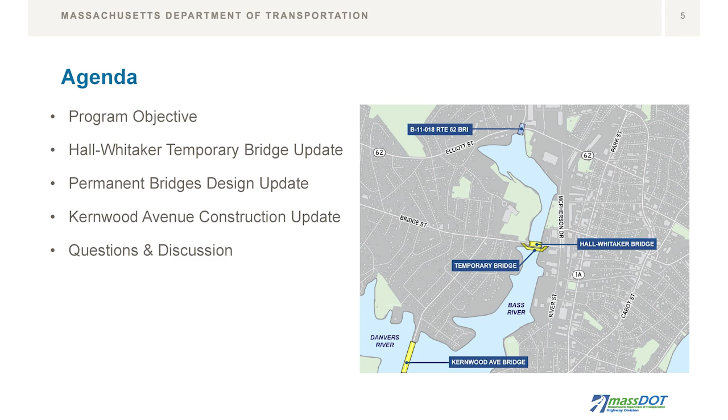So just to quickly go over our agenda, even though the mayor kind of blew through that pretty accurately, we're going to go over our objective, the temporary HALL-WHITAKER bridge update, the permanent bridge updates, Kernwood Avenue construction update for the maintenance project, and then we'll have some questions and answers.

So just to revisit our program objective, it's one program, two bridges. We want to restore vehicular traffic to Bridge Street. Currently, there's only bikes and pedestrians that are crossing that bridge. It still opens for marine traffic, but while we continue maintenance and rehabilitation of the Kernwood Avenue Bridge, we'll be progressing that, as well as the full bridge replacement of both the HALL-WHITAKER and Kernwood Avenue Bridge, and we want to deliver this program in the safest and most efficient method possible.

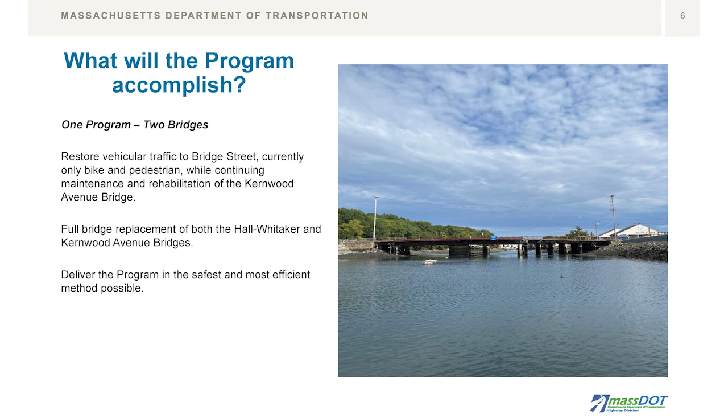So the Hall-Whitaker temporary bridge update. I'm going to run through the staging and permitting approaches, some changes that made things a little more simplified, regulatory agency approval status, schedule update, and the construction sequence.

This slide shows some staging and permitting approach changes. We added an early utility contract that allowed us to move all the utilities off the bridge. I think that's already completed at this point. Everything that needs to be out of the way to allow us to begin construction as soon as the contractor is on board for the temporary bridge has been moved out of the way. There is a phase 2, but none of that will slow down the progress of building the bridge.

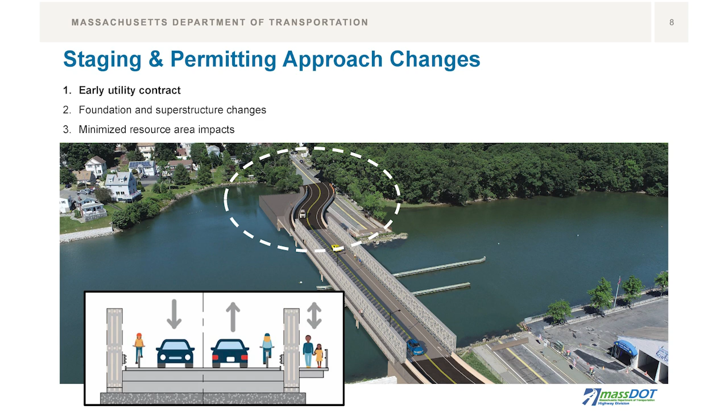There were some foundation and superstructure changes that minimized resource impacts. So what was this design change and why? Some of the challenges we were facing with the original design, which was a filled section—you can see that square section on the west side of the bridge, it looks like a platform—that was a filled section. So we were filling in mud flats, and that was impacts to the resource area, and that required some really complex permitting.

So VHB came up with another approach. They are going to install that platform on piles, and some of the benefits of doing that is minimizing those impacts to the resource area, simplifying the permitting process, and reducing some of the construction risk.

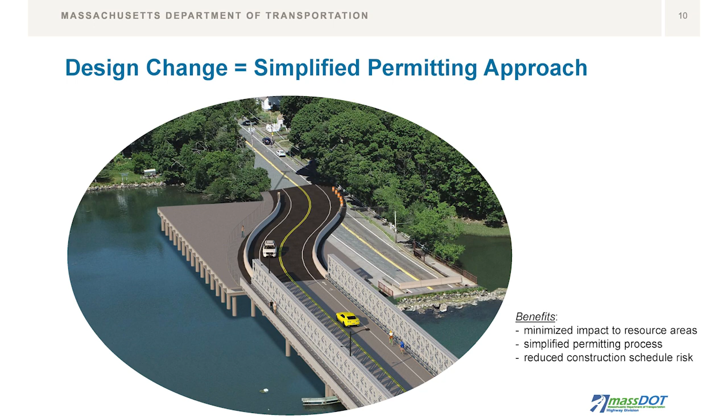So regulatory agency approval status. At this point in time, we have all the permits we need to construct the temporary bridge. This was a major collaboration, as the mayor said, between the mayor's office, the governor's office, MassDOT, all the state and federal agencies, and we were able to expedite this in a fairly quick manner.

One thing that happened was the Coast Guard denied our advanced approval, so we do not have the Coast Guard permit. That's one permit that is still outstanding. We have to go through the regular full bridge permit process. That will not slow down the advertisement of the project. Right now it is under review, and we're confident that we'll have that in time for our notice to proceed.

And with that Coast Guard permit will come the NEPA categorical exclusion, also known as the CE, that will come at the same time.

I want to further emphasize some of the benefits of the collaboration that helped expedite the permitting. Not only that, but simplified it, and we got some really great benefits that are going to help advance construction a little more simply and quickly. NOAA, the National Oceanic and Atmospheric Administration, issued conservation recommendations, CRs, for work in water in the Bass River. This is essentially controls and best management practices specified or intended to avoid, minimize, mitigate adverse effects to essential fish habitat, EFH, and protected species.

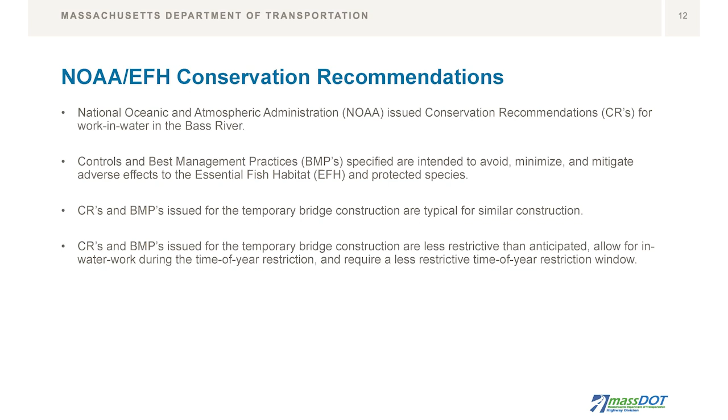So to update the schedule, going back to our last public information meeting last spring, April to July 2024, we received a 75% highway bridge design submission that was reviewed and approved. Right-of-way was approved. In the summertime, we finalized and submitted all our environmental permit applications, and completed additional borings at Bridge Street that we needed. Then in the fall, leading to the end of the year, we finalized our 100% design. That was approved, and the right-of-way plans advanced as well.

And now here we are in January. We have our final PS&E submission—we just got the very final today. So we'll be finalizing bid documents. I think we were last here saying that we were going to advertise in the spring of 2025. We're really happy to say tonight that we're advertising February 22nd of 2025.

All our final environmental permits are just about done, and we're just still waiting for that Coast Guard permit, but it won't slow things down.

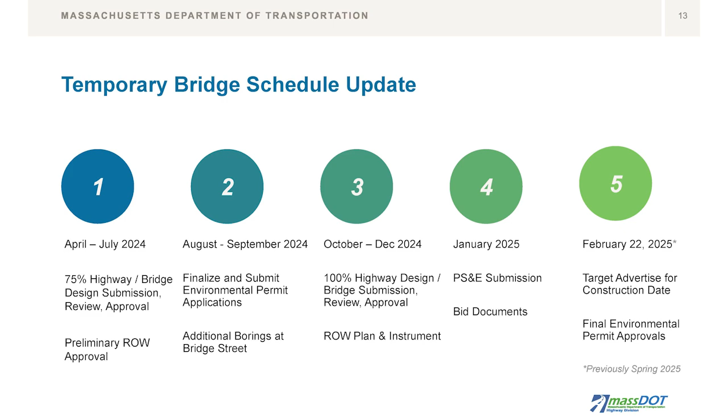At this point, I'm going to turn things over to Nick from VHB, and he's going to describe the construction sequence and how we're going to build this temporary bridge. Nick?

So our design is essentially complete at this point, and we're finalizing what we call our contract time determination, or CTD. It's a construction schedule and a sequence of activities that gives us a level of confidence that we can construct the project and how long it's going to take, so that we can include that duration in our contract with our awarded contractor.

So I just want to talk through some of the sequence. The top of the slide here is the existing plan. This is what we basically started with. The orange indicates the existing bridge out of service. Ryal Side neighborhood is on the left of the screen here. The car wash, Moynihan parking lot in downtown Beverly on the right. The arrows indicate pedestrian access.

So we are maintaining pedestrian access up until our utility contract. As Rob mentioned, we took our first phase of utilities, shown here as phase 1 by others, and created a separate contract in advance of the bridge contract. That would allow us to do all of our third-party utility coordinating and relocations ahead of the bridge construction contract. That mitigates schedule risk as well as coordination risk with the utilities.

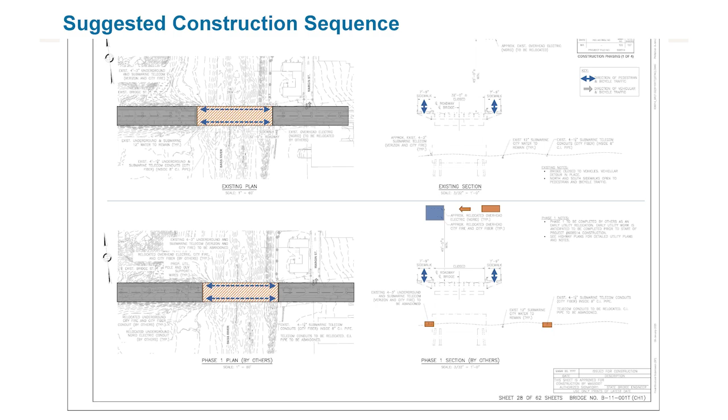That work is ongoing right now. Simultaneously, MassDOT has undertaken the rehabilitation of the northern sidewalk. So that's why that northern sidewalk is out of service. The deck is heaved, and that's being completed as part of one of their maintenance contracts.

With the early utility contract, looking here, this is a section of the bridge. We're going to relocate the overhead utility lines from the south to the north. We're also going to relocate the underground and actually submarine cables. So on the right here is a city fiber line that will be relocated with the National Grid overhead.

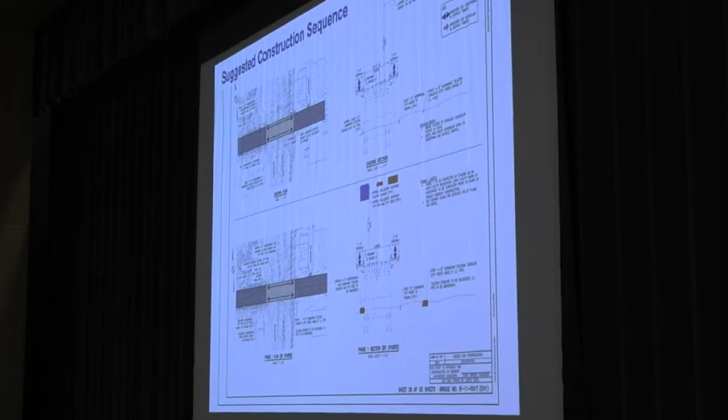The Verizon line is being rerouted to a different service that stops short of the bridge. These lines will be abandoned in place. There's also a city fire alarm that will also be relocated from submarine to overhead. That will set us up for the temporary bridge construction project.

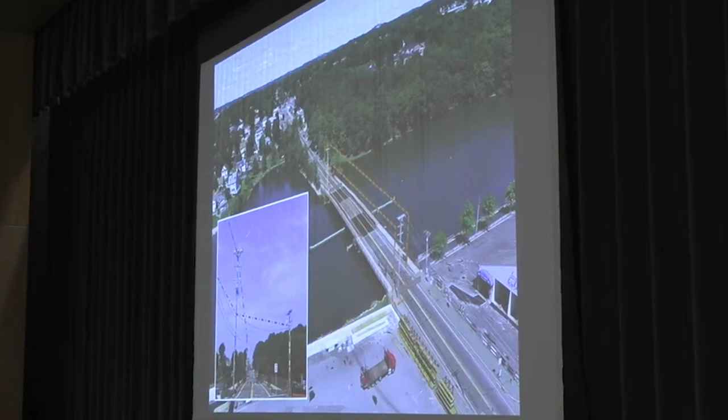So looking here, this is a rendering of the existing bridge. You can see here the utilities on the south side. Here you can see a shot looking from the Moynihan and car wash side towards the bridge, showing all the overhead utilities and the crossings.

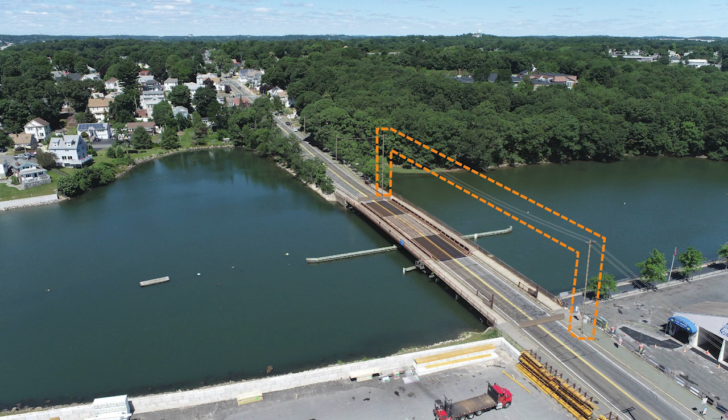The idea is that we will move all of these out of the way under this early utility contract from the south to the north of the bridge. That allows us to start construction on the south side for the temporary bridge, where it will come out, around, and then back in.

Going back to our plan views, again Ryal Side on the left, downtown on the right. Our construction sequence is such that, as Rob mentioned, we have a platform. We're calling it our approach span. This is supported on piles. The intent is that this becomes a staging area for the temporary bridge construction.

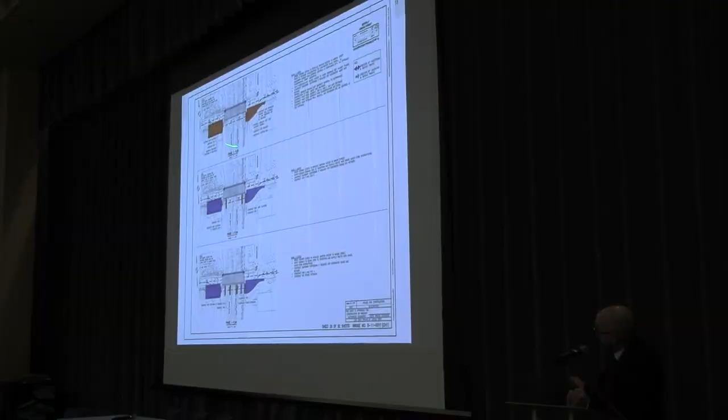So while we're constructing on the west, we're also constructing on the east a retained fill section, and we work in from outside in. In the next phase, we'll start constructing from there, reach in over the water, and start construction of our abutments and piers, which are supported on piles down to rock. Then we'll continue that and continue to work on the inside.

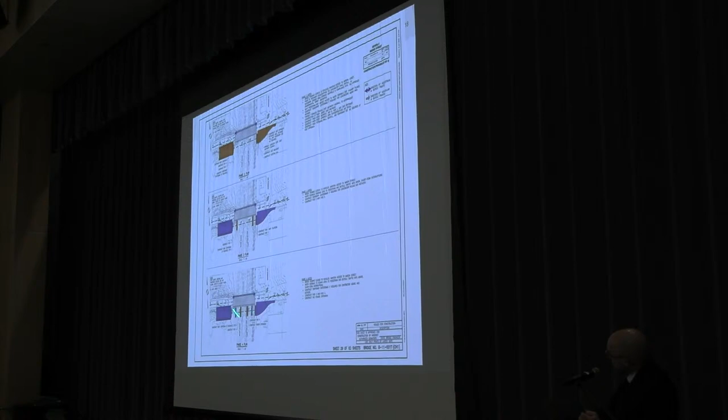The project is permitted such that we have the ability to work from barges and from land. Once the substructure is installed, the substructure being the piers and abutments, we'll start construction, completing our platform. This includes a concrete cast-in-place deck.

And then from there, we'll start construction of our panel bridge, our prefabricated panel bridge. It comes in sections of 4 to 12 feet. You'll see a rendering of one of them on the next slide. It's built in sections, and as we build it, we launch it on rollers.

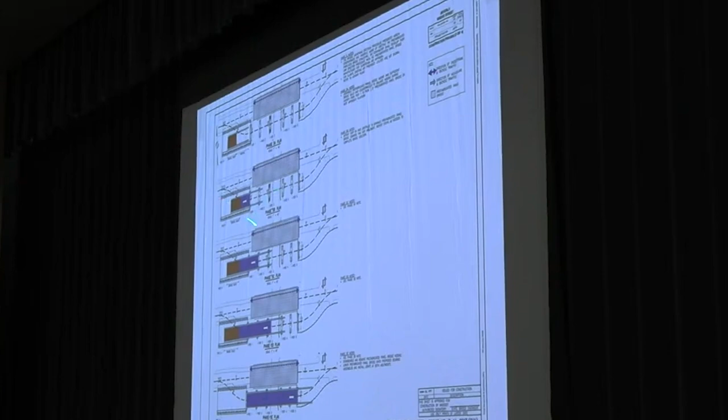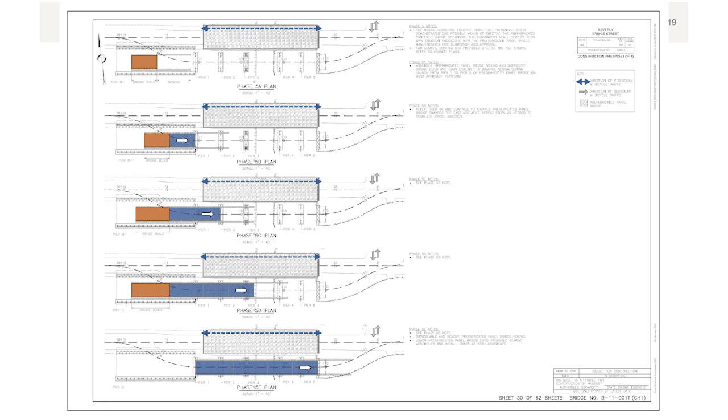So we essentially cantilever it out over the crossing with a back span of counterweight. Another method that is possible is using an assist crane, either from the land or from the water, to counter that load as well. And we build and launch, build and launch, build and launch until we have completely crossed the river.

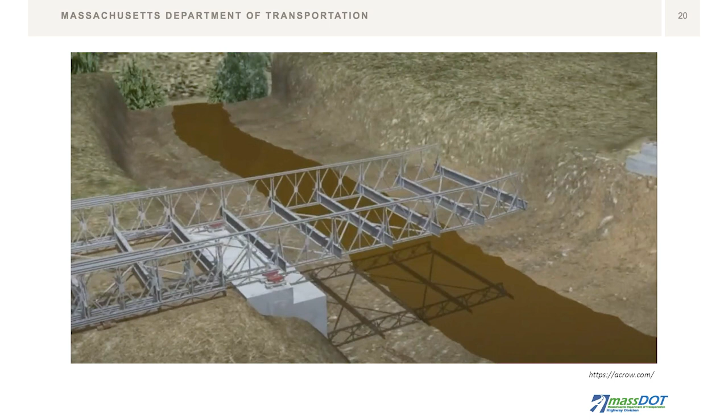This is a rendering from Acrow of a similar application, just to show the panel bridge and how it's built and then launched out, cantilevering over the feature that's crossed.

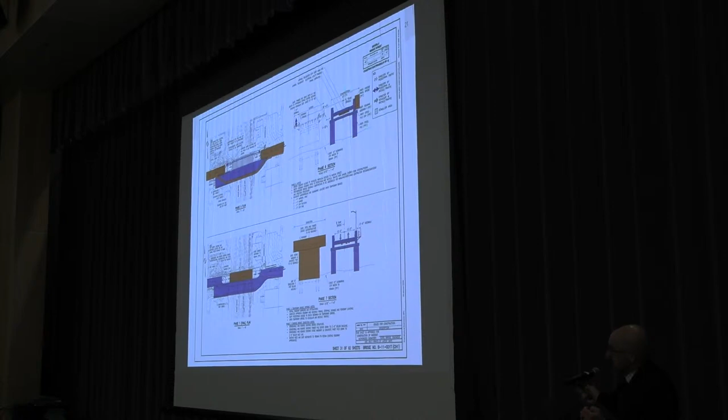Once the bridge is launched and in place, a temporary bridge, the contractor may elect to then go and place all the deck panels, prefabricated deck panels, and the sidewalk as well. The sidewalk will be a cantilevered sidewalk.

At that time, we'll also relocate the overhead wires that we moved from the south to the north, from overhead to under the bridge. That's where they'll stay during the demolition of the existing bridge, once the temporary bridge is open to pedestrians, vehicular traffic, and bicycle traffic.

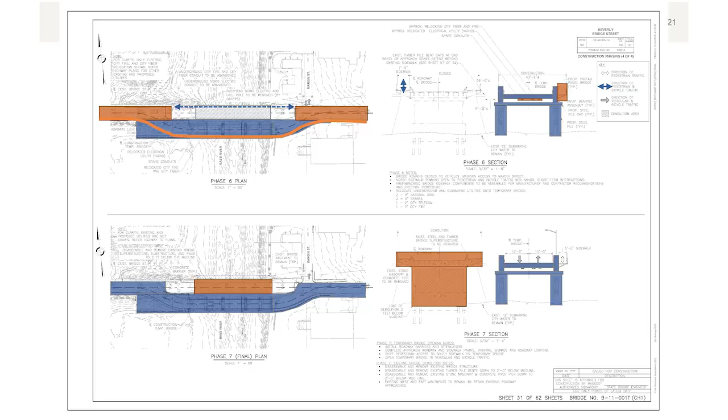That'll also clear the way for construction of the permanent bridge. At the completion of the temporary bridge contract, we will have all utilities relocated, the temporary bridge in place, and the existing Hall-Whitaker Bridge demolished. A rendering shown on the bottom left shows the configuration: one travel lane in each direction, one bicycle lane in each direction, and a sidewalk shown here on the south side, as far away as possible from the proposed construction of the permanent bridge.

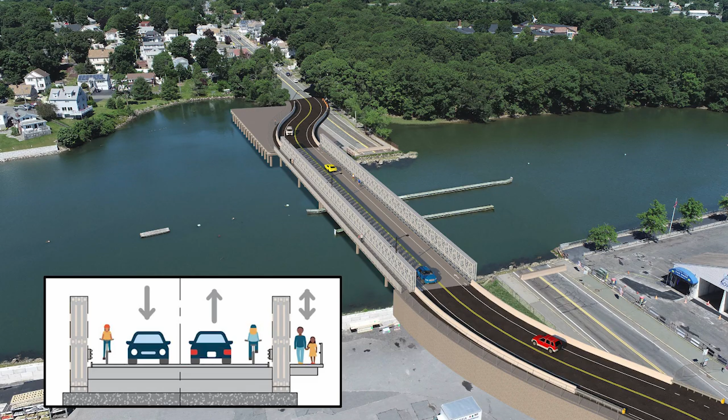Thanks for that great explanation, Nick. So that's the update for the temporary bridge.

We're going to move on to the update for the permanent bridge design. I'll go over the schedule update, bridge design development summary, regulatory agency approval process, and next steps.

So, permanent bridge schedule update. Last April, we received a Bridge Street Bridge Type Selection Worksheet submission, which was reviewed and approved. We also got the Kernwood Avenue Bridge Type Selection Worksheet submission, and that was reviewed.

The Bridge Street pre-25% design was submitted in June and was reviewed and approved. The Kernwood Bridge Type Selection Worksheet was approved in August, and then in September the Kernwood pre-25% design submission was reviewed and approved.

This fall, leading through the winter, we completed a geophysical survey at both locations. The Kernwood Avenue design boring program was started, and I believe it's still ongoing. The 25% highway and bridge design development continued, and we're expecting to get the 25% design submission in March.

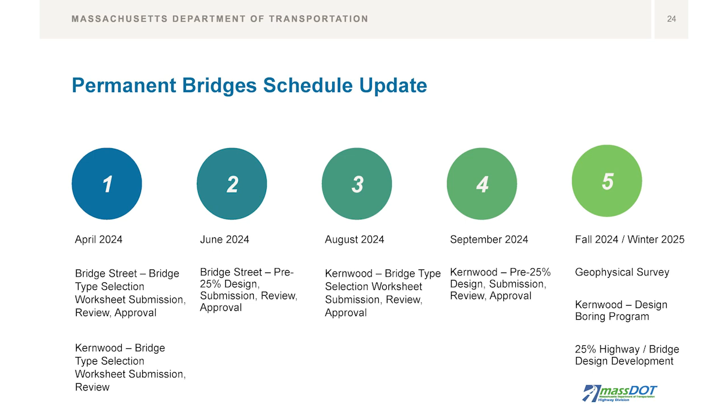So some of the basis for the design for both bridges: we're going to maintain the existing navigational channel location and the horizontal clearance, but our goal is to increase the vertical clearance in the closed position for both bridges. This will minimize openings and maximize the size of vessels that can travel beneath the bridge without opening it, which would be a great benefit to traffic. Anytime you minimize the openings, you don't have to disrupt vehicle traffic going over the bridge.

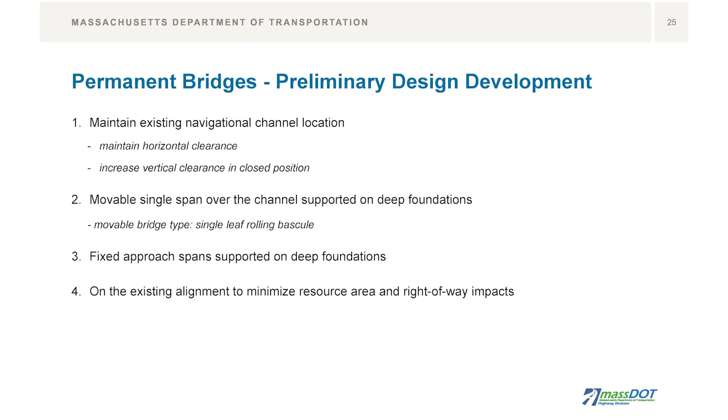So, a movable single span over the channel supported on deep foundations - that's our targeted design, with a bridge type that's going to be a single leaf rolling bascule. Rather than a swing bridge like they have today, it'll just be one leaf that goes up and down. The fixed approach spans will be supported on deep foundations, and both bridges will be replaced on the existing alignments to minimize resource area and right-of-way impacts.

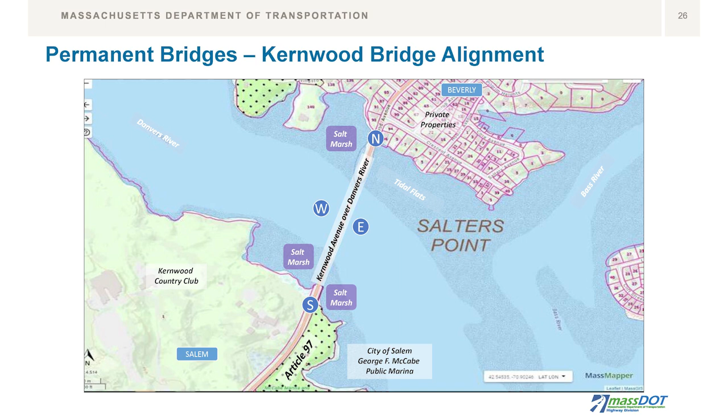This is just to show the current alignment at Kernwood, and we're going to be replacing it in the same location. You can see that it's surrounded by various resource areas - salt marsh, tidal flats, Article 97 land - so there's a lot of permitting involved with this bridge, which leads us perfectly into what we think the schedule is going to be for the permitting.

It's going to influence our design - we're going to design to minimize the permitting as much as possible. A couple of major permitting issues with this one are Article 97 land, which requires a change in legislation, as well as impacts to 6F. So we've already started working with the OEA on the 6F permitting application, which also involves national parks, so it's also on a federal level.

Currently, highway design, right-of-way design, geotech, hydraulics, sketch plans, and early environmental coordination have been ongoing all fall leading through the winter. We've already had early environmental coordination meetings. So, like I said earlier, our goal is to get that submission in from VHB in March of 2025, followed by a public hearing sometime in late summer or early fall this year.

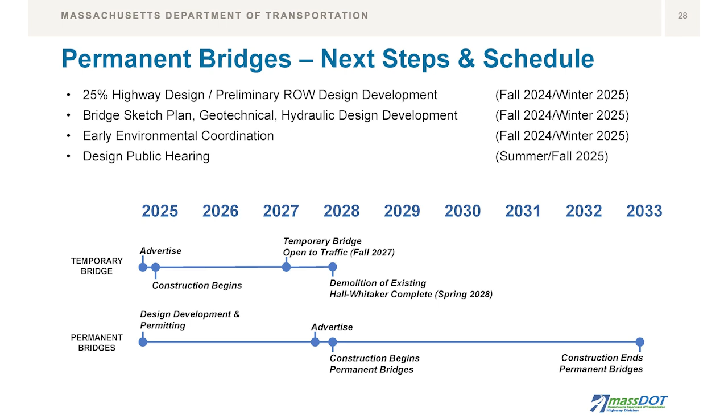So at this point, I'm going to turn it over to Paul Stedman from District 4, and he's going to give us an update for the Kernwood Avenue maintenance project.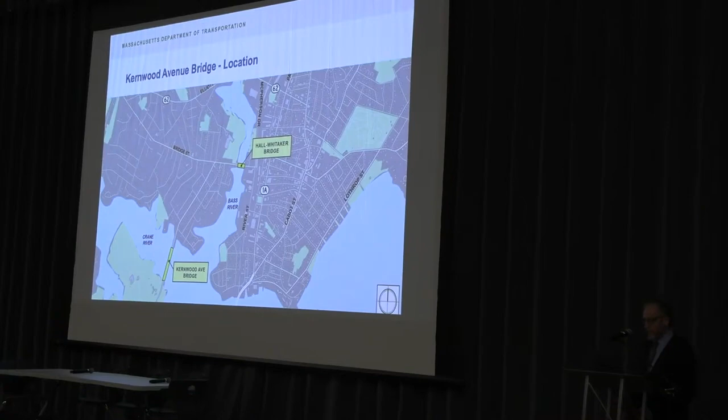So just to give everybody a reference point, Hall-Whitaker here, and we're dealing with the Kernwood down here. So how did we get here? Back in 2017, there was a bridge inspection that was done, and as a result of that inspection, MassDOT conducted a bridge rating. As a result of that bridge rating, some fairly hefty bridge restrictions or load restrictions were put into place in summer of 2018.

In the winter of 2022, as part of the collaboration with VHB and their team getting ready for the Kernwood Avenue full replacement project, there was an assessment report that was completed that really identified the existing conditions on the bridge. And that assessment identified some areas that were in need of some rehabilitation.

As Rob had said, one of our goals here in this rehabilitation project is to ensure that the Kernwood remains in service, safe, and reliable throughout the duration of the construction of the temporary bridge and until such time as the permanent bridge construction for Kernwood reaches a point where that bridge will be taken out of service.

So we worked with H&H and our bridge preservation team in our Boston office during 2024 to develop the rehabilitation contract. And then in the summer and fall, that procurement took place and SPS was brought on board to start the construction that's been going on.

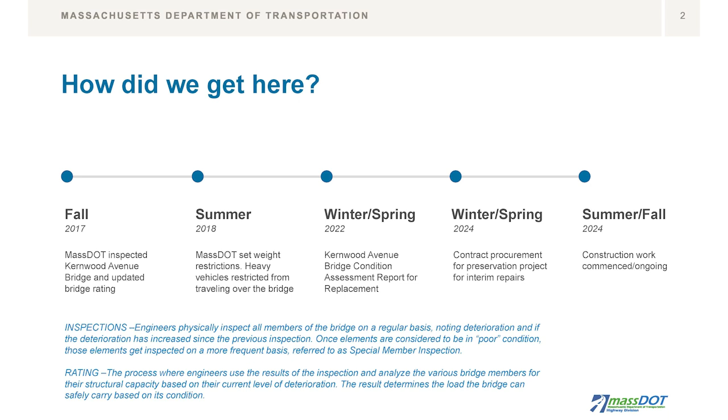So the existing conditions, as I said, the bridge, as a result of that rating, some weight restrictions were put into place. It's currently posted for 10 tons, which limits access by heavy vehicles, emergency vehicles, school buses, and other larger vehicles. And the rehabilitation project, the goal of that is to focus on keeping the bridge in service.

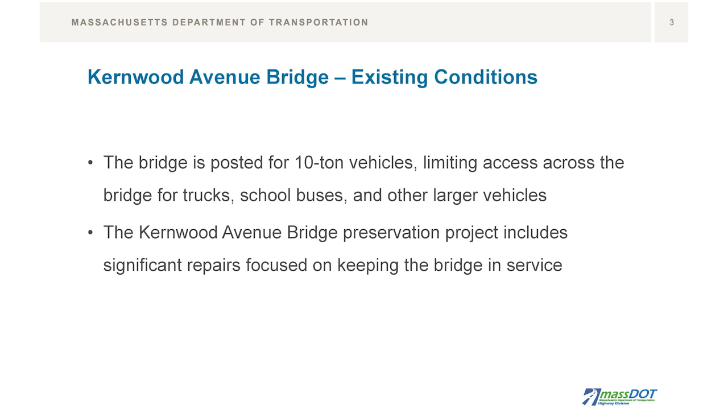It's not meant to bring about significant improvement in the weight posting. It's more or less to keep the bridge working in a great, satisfactory manner that ensures it's going to be reliable until that larger replacement project comes to fruition.

So just some photos showing the existing conditions and what we're focusing on. Picture on the left is showing the timber piles, some deterioration. That's the substructure elements that are supporting the bridge. In the middle, it's structural steel elements that are part of the superstructure for the bridge. And then this last picture on the right shows the steel grid deck that makes up the decking, the riding surface on the movable span.

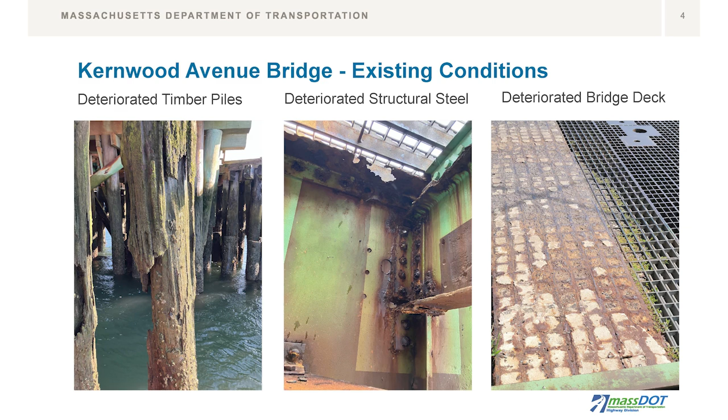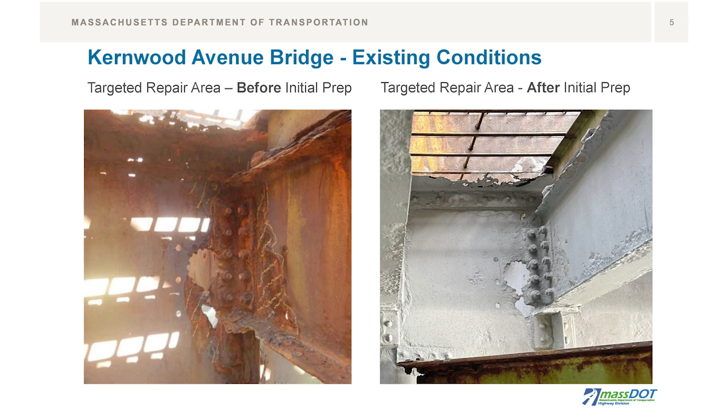So some of the areas that we've been focusing on, showing some of the pre and current photos as we get going: picture on the left shows that area where we're going to be doing steel repairs, and the picture on the right shows the work that SPS has already done so far, doing what we call the surface preparation, where they'll go in and clean and prime that steel repair and get it ready for the ultimate steel repairs, which will consist of bolting on replacement steel to beef up the structural capacity of that member.

Similarly, the timber piles showing the existing deterioration on the left, and then what you see on the right is a jacketed pile repair. It's basically a fiberglass jacket that then cementitious grout is pumped into. Sometimes in some cases, there'll be reinforcing steel that's added to those. But that's a permanent type of repair. That jacket stays in place.

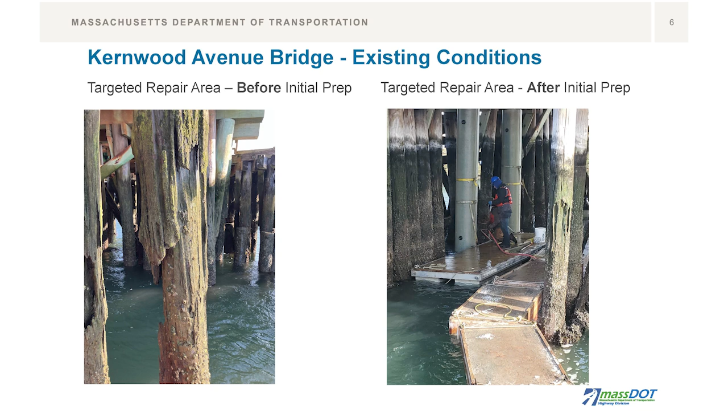As you can see, they're out there in the water. This picture was actually taken a couple of weeks ago during some very frigid weather. So I know SPS has been working hard at this project since it started, but encountering some tough conditions, but nonetheless continuing to forge on.

The project scope: the design was initiated in 2023, and it's intended to extend the bridge's service life. The overall budget for the project is $12.9 million, and the general scope includes structural steel repairs on the approach spans and the movable span, substructure repairs to the timber pile foundations, and significant repairs to the mechanical and electrical systems that operate the bridge.

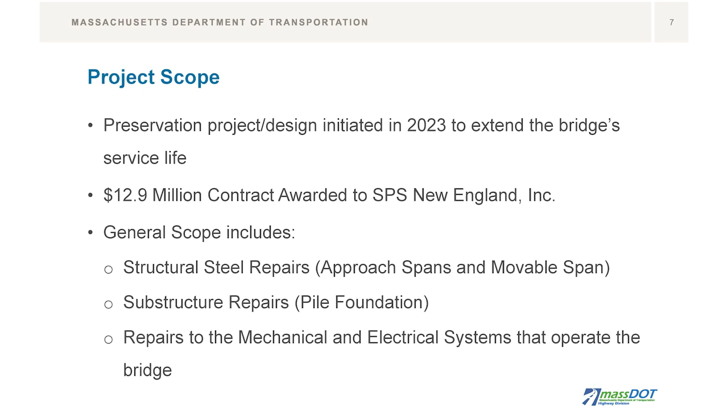So the impacts that many of you have seen thus far and are still to come: a lot of the work you're seeing out there right now is taking place during the day, during weekdays. Sometimes we'll use alternating one-way traffic, but for the most part, the work has been able to be done while maintaining two-way traffic. There will be some nighttime operations kicking up in the spring when we get into the structural steel repairs, and there's been some intermittent night work throughout the project, but thus far fairly infrequently.

The contract does provide for a full closure of the bridge for some work items that simply cannot be done without the bridge being closed to vehicular traffic. That closure period is expected to occur sometime this summer, based on scheduling we've been working through. The duration is targeted at about 6 weeks — that's kind of a best case scenario. It could expand a little bit, but that's what we're focusing on.

In response to some comments and questions from Mayor Cahill and others during a recent briefing, we're working with SPS and their material suppliers to see if it might be feasible to advance that closure period to earlier than summertime. That is still a work in progress and we do not have a known outcome yet. A lot of this work requires specialized material with long fabrication times, and there's also work SPS needs to do to get ready to complete those activities. We'll report back to Mayor Cahill and other stakeholders once that review concludes, but right now it's in motion and being considered.

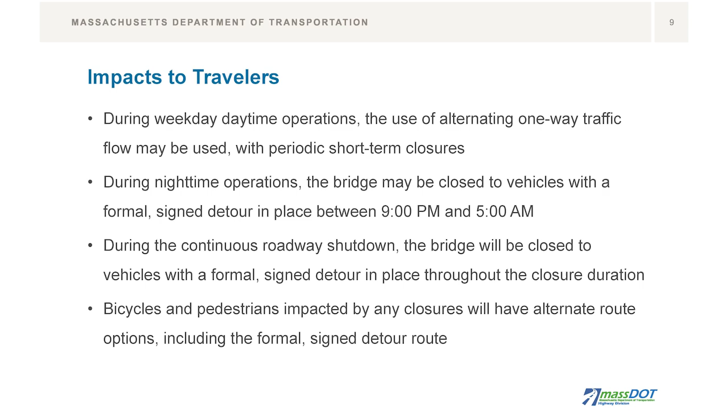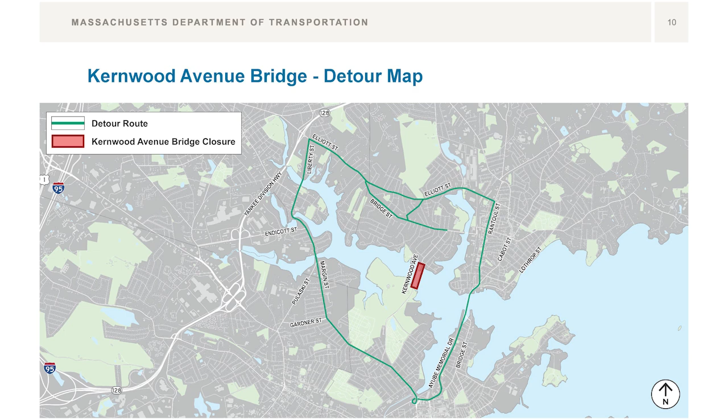This is a schematic that shows the detour map when it's used either during an overnight closure or during that continuous closure that I mentioned. As I said, we're somewhat boxed in by river crossings that are available. So to the east, it's over to Beverly Salem Bridge, and to the west, it's towards 128 on Liberty Street.

I just wanted to follow up with the schedule. We advertised the bids for this project in early March of 2024. It was a fairly rapid procurement, with a contract awarded in May and the contract notice to proceed in May. Physical work started in fall of 2024, and we expect the contract to wrap up towards the end of this year in November.

At this point the update is complete, but we'd like to open things up to some questions. As is tradition, we would like to ask elected officials if they have any questions first. Mayor Cahill, did you want to speak, or you're all set? Is there any other elected officials? Councilor Rotundi, how are you tonight?

A few questions. We have 4 projects basically going on in Ryal Side. I had some questions sent to me by some neighbors who could not come tonight. One of the questions was about the staging areas, specifically for the temporary bridge construction, and how those vehicles will be coming, whether through Bridge Street or McPherson Drive. I don't know if you have a plan, or at least are mindful of how that may be happening.

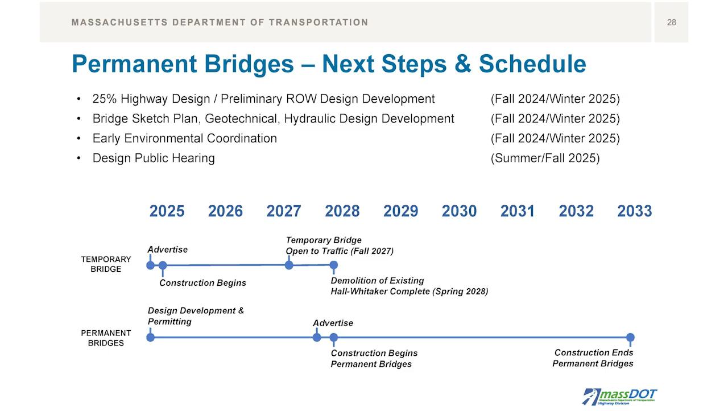As far as overseeing goes, VHB will be hired to continue construction phase services to support MassDOT, and MassDOT will have at least one full-time resident on site with the contractor, observing the work for compliance and conformance, with VHB at the ready should any issues arise. Does that answer your question?

Any other questions?

Hi, my name is Steve Bissell. I live on Ashton Street in Ryal Side. I think just a couple of clarifications on the young lady that was talking about the approach from Bridge Street on Kernwood down to Kernwood. I think her question was more from where the end of the bridge is, where you're going to replace, from there up, the road is going to be worn and torn over the next number of years. So her question is, will some form of funding be available for fixing that upper area later on? I think that was her question.

Understood. I think Nick was trying to describe the extent of our limit of work and how far the paving would go. Right now the limit of work does not extend all the way to Bridge Street. It probably extends to Upland, on the Beverly side.